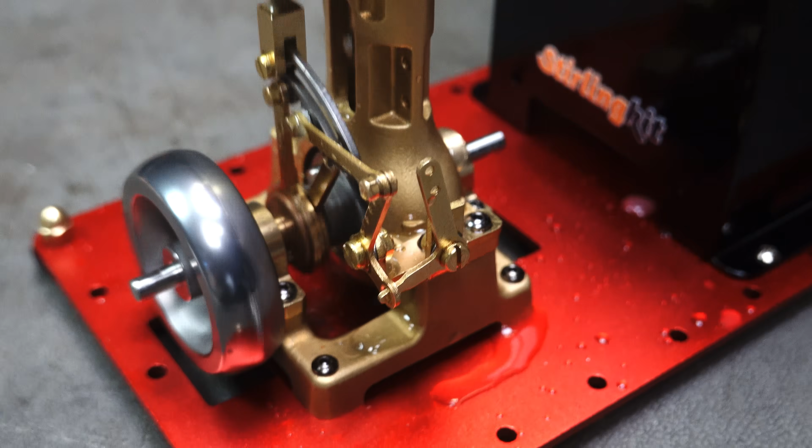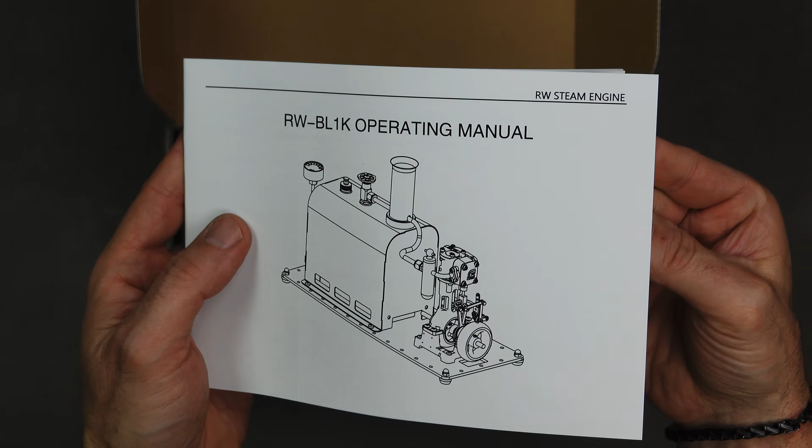Let's quickly have a look at what you get in the box. So it's the RW-BL1K operating manual. It's pretty sweet, gives you everything you need to do, all the parts, which are there a lot of. You can see it's got a very clear step-by-step instruction, assembly of the crankshaft base, pretty easy.

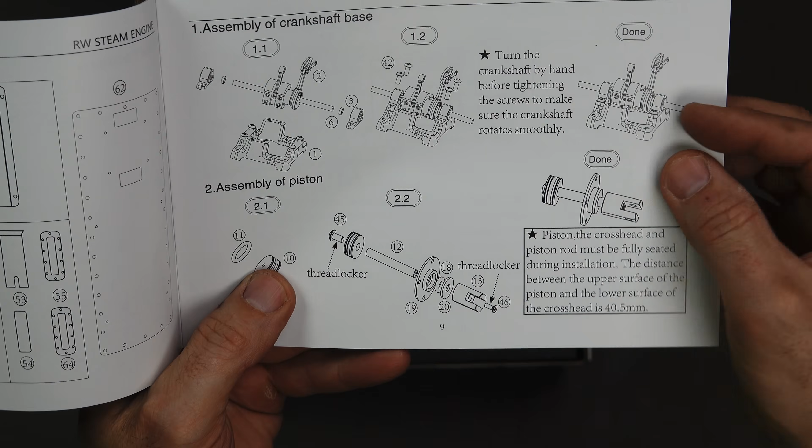Gives you some nice, simple, easy to read instructions. So I'll build this off camera, but there you go. A nice instruction manual. Nice anodized aluminum red base there. There's the main boiler. It's cast aluminum parts, nice and heavy.

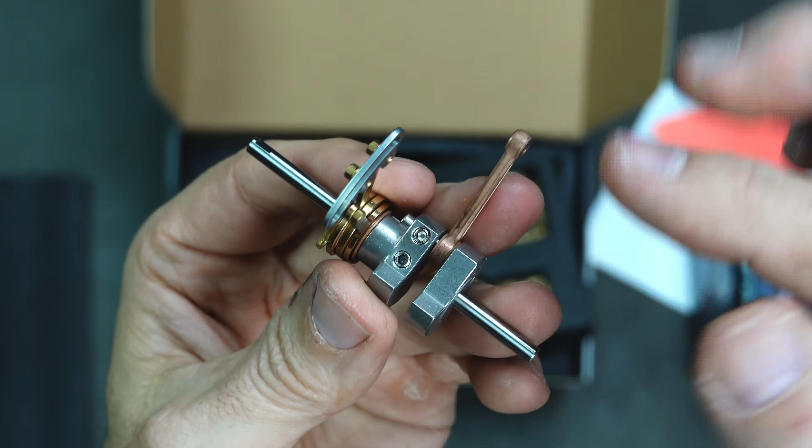Some of the parts are already pre-assembled to a degree. There's your crankshaft, your connecting rod, as you can see. So all this is nicely assembled, ready to go. A lot of the finicky stuff is pre-done for you, with small parts pre-pressed bearings in some of these parts. So you got a flywheel, a counterweight, cylinder head.

You got a couple of different size screwdrivers, a flathead, Phillips head, some tweezers, spanner, and then also some more parts. So, all right, don't waste too much time. I'll crank all this together. If there's anything exciting, I'll show it up. If not, let's get building and let's see the final result and let's get this thing running.

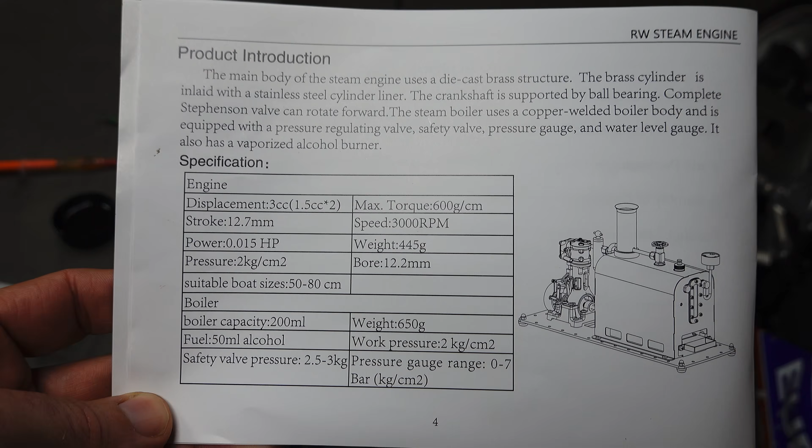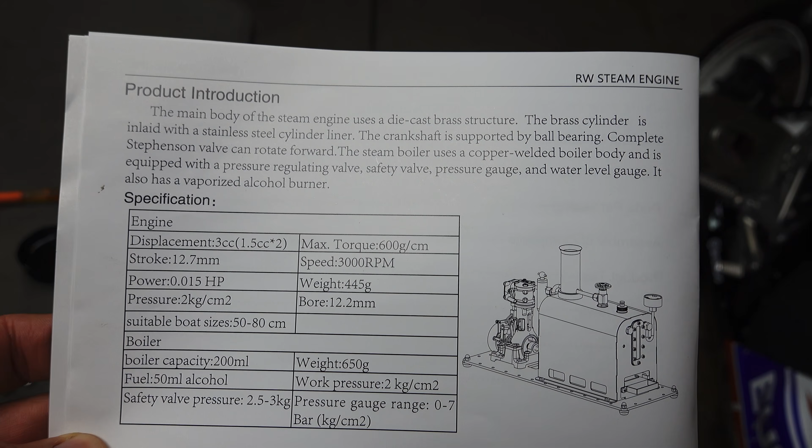So here's some of the product information about it. It says the main body of the steam engine uses a die-cast brass structure. A brass cylinder is inlaid with a stainless steel cylinder liner. The crankshaft is supported by ball bearings. Complete Stephenson valve can rotate forward.

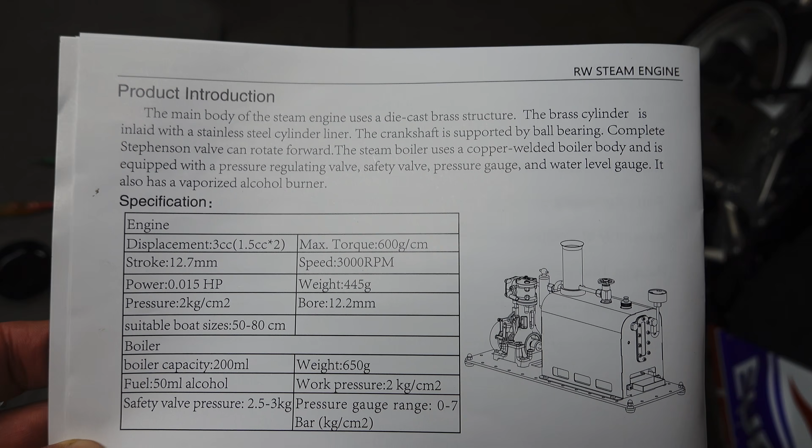The steam boiler uses a copper welded boiler body and is also equipped with a pressure regulating valve, safety valve, pressure gauge and water level gauge. It also has a vaporized alcohol burner. So I've got to mention all that, but here are some of the other specs there.

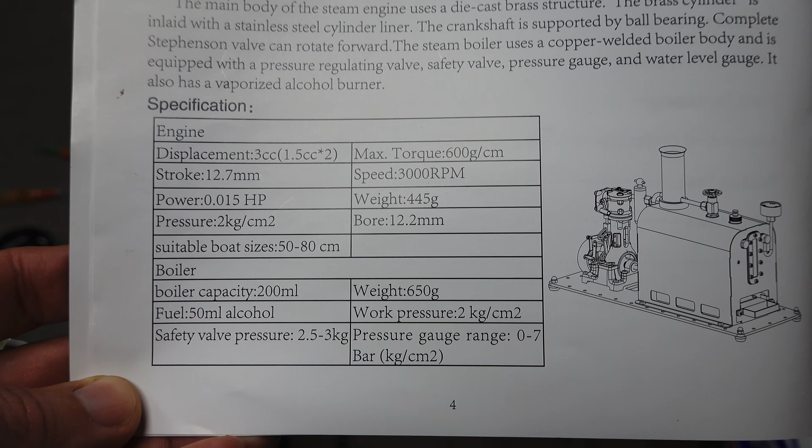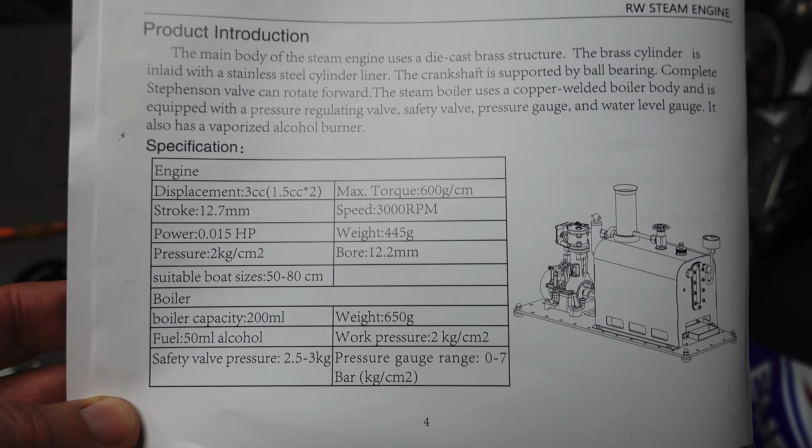0.015 horsepower. Now it could be used for a little boat, that'd be pretty sweet. The boiler capacity is 200 ml. Fuel is 50 ml alcohol. All right, let's see how this thing performs. I've seen some other reviews and it actually performs really well, especially for the price.

Now in here is where you add your oil. So a little syringe of oil here. Put it in there, fill it up. Pretty interesting design. So you put your oil in there.

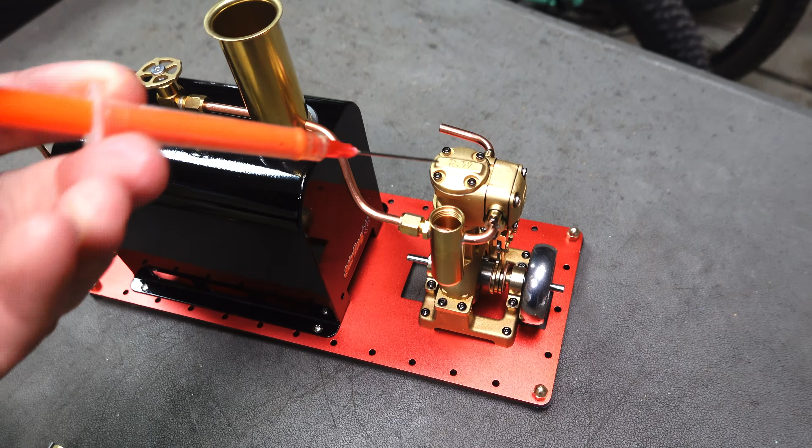Just about that. A little bit more soon. Your water will go in there. And then obviously we'll fill it up with alcohol. Slide it up in there. Watch this pressure rise, and let's see how she goes.

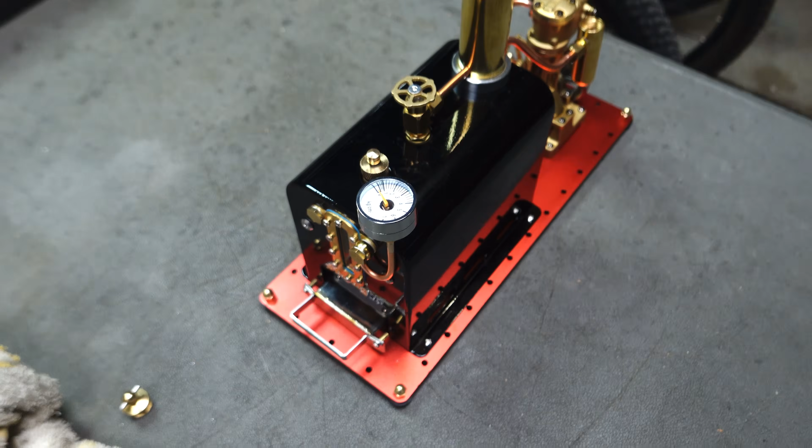Alright, put up the water level. It's approximately there. Started this bad boy up. And let's see how long it takes to boil. See in a bit. It's hard to see, but there is a flame there.

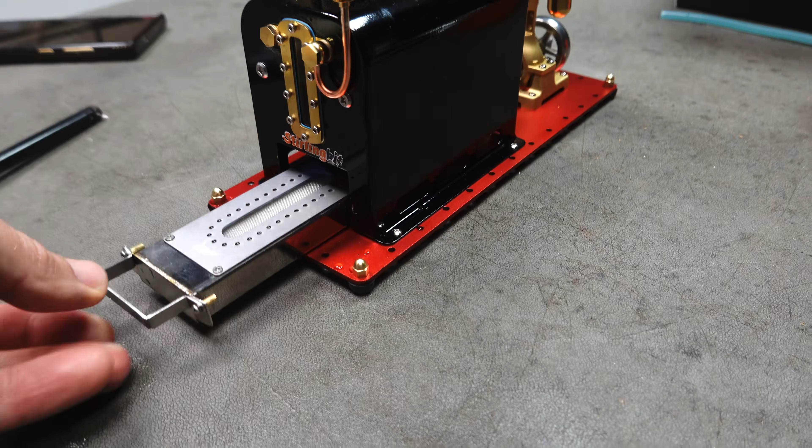Okay, it's pretty much ready to go. Just under 3 bar there. Everything is looking good to go. Let's open this valve a little bit. And you've got to give it a bit of a kickstart.

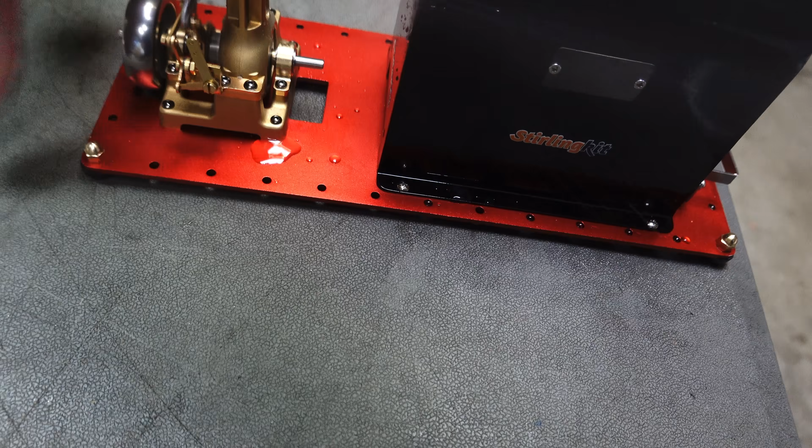Let's open up a tiny bit. There we go, that runs magnificently. Still sitting at 2 bar, and that took approximately about 5 minutes to heat up, but it's always going to depend on how much water you have.

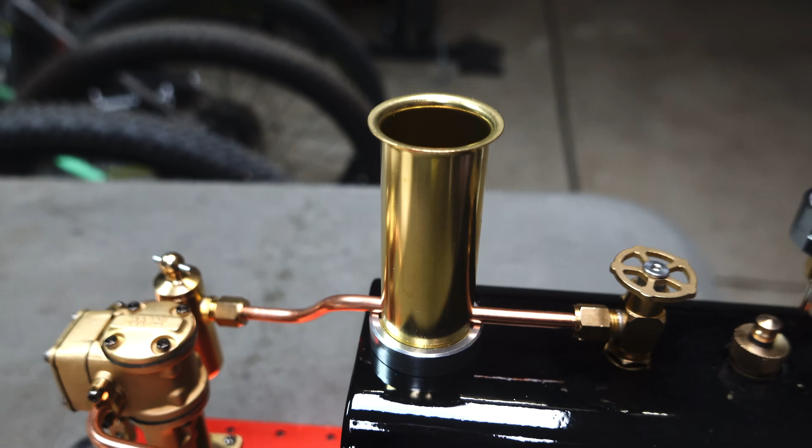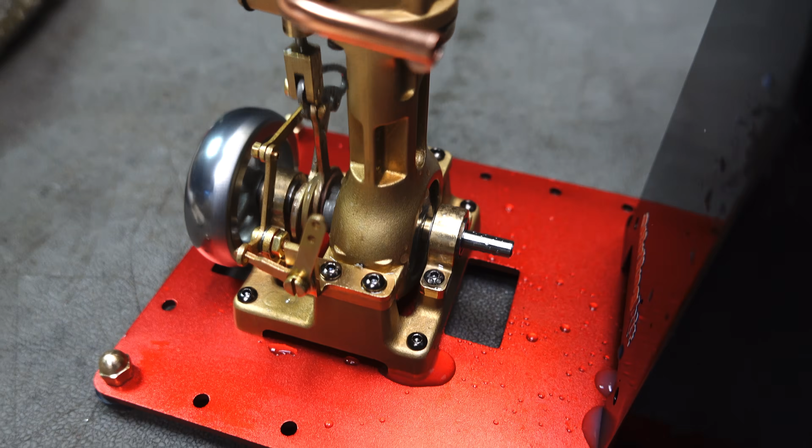Just putting along. Beautiful. And obviously you got the reverse here. I'm not too sure, is it the best practice to turn it off and then do it? So now it should spin the other way. There we go. Magnificent, putting away nicely.

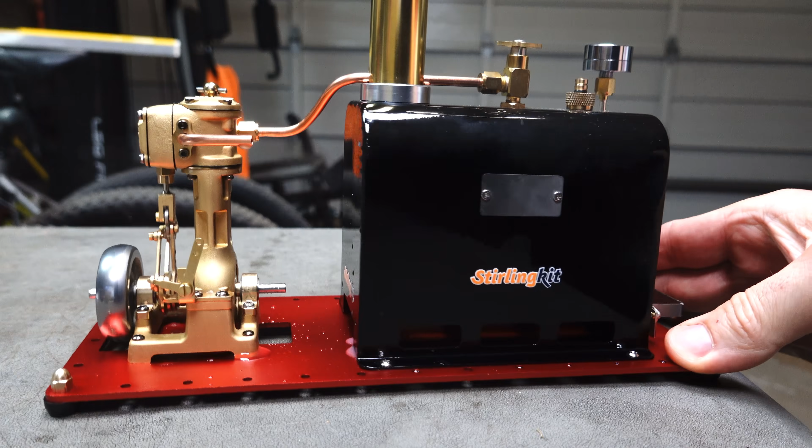Still sitting at 2 bar, or just under 2 bar. That's beautiful. Put the camera down. There we go. That is running magnificently. Now, bring it around here. There we go, just look at that.

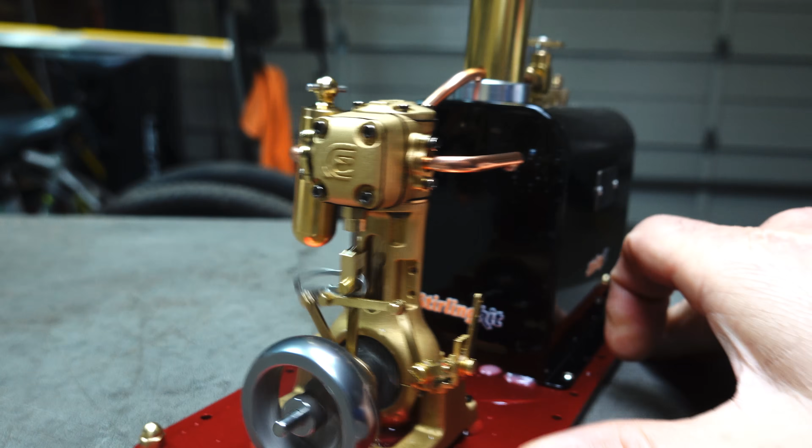Sorry, bump the table there, but increase RPM. A bit of vibration there, but look at that. Magnificent. Sorry guys, I'm just blown away how smooth that runs. Get rid of some of this excess water. What do you guys reckon? Just check out that. Running faultlessly.

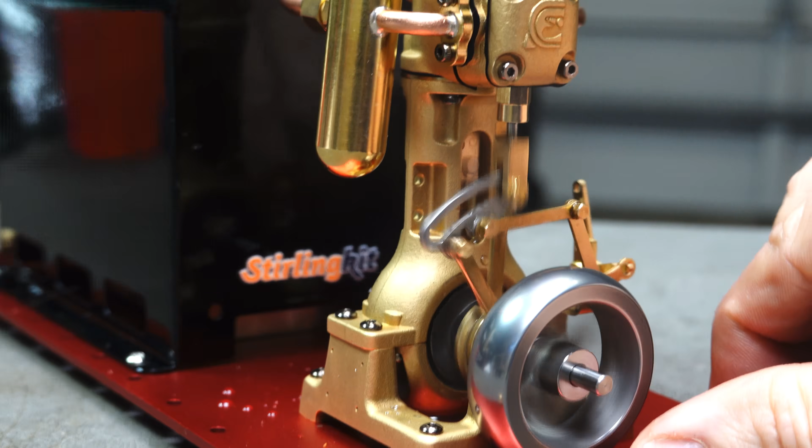I love old school steam engines, how could you not? Everything is just mechanical, you can see everything. That's why I don't like diesel or any new electric locomotives. Can't see nothing. But there we go, what do you guys reckon?

I think it's a fantastic kit. Amazing value for money when you think about it. Yeah. Alright, let's just shut her off. We're still sitting at 1.5 bar. So if we increase the RPM, look how smooth that runs.

Amazing. It's very responsive. Max RPM. And lower it straight back down. Alright, I think it's amazing enough. It's a great model. It's at 1 bar now.